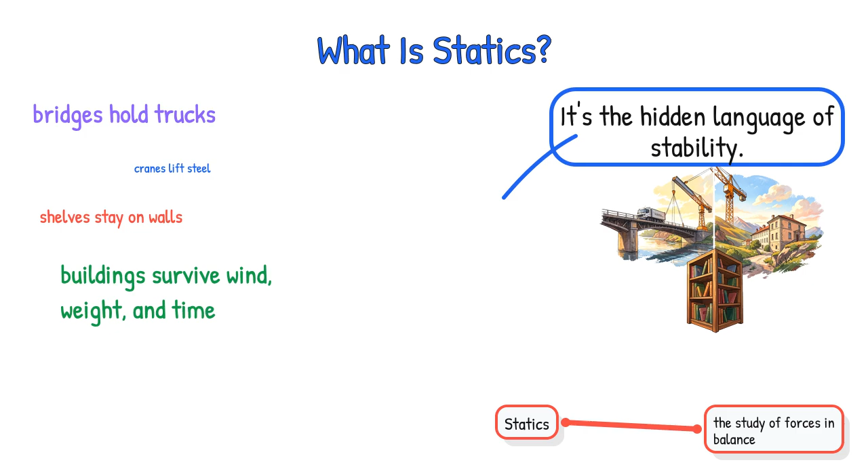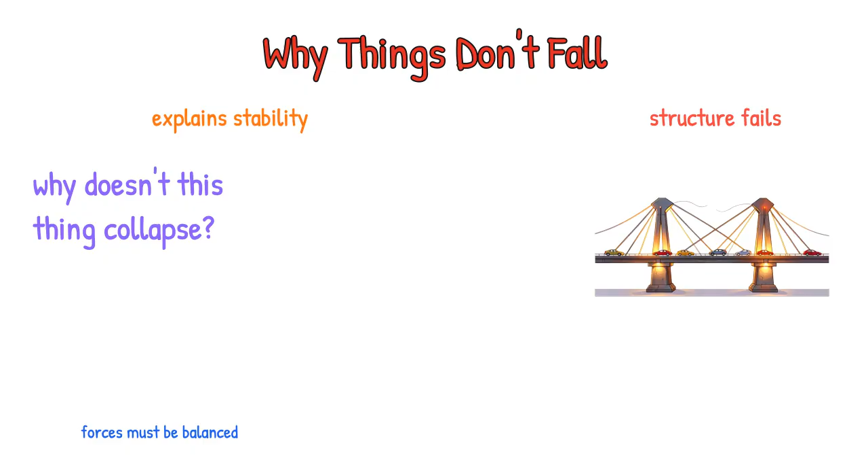The first reason statics is fascinating is simple: it explains stability. Every object around you is being pulled, pushed, compressed, stretched, or twisted. Statics helps answer the question, why doesn't this thing collapse? Take a bridge, for example. The weight of the bridge itself, plus cars, wind, and people, all create forces that must be balanced by supports and internal stresses. If those forces are not understood correctly, the structure fails. Statics gives engineers the language to predict that before anything is built.

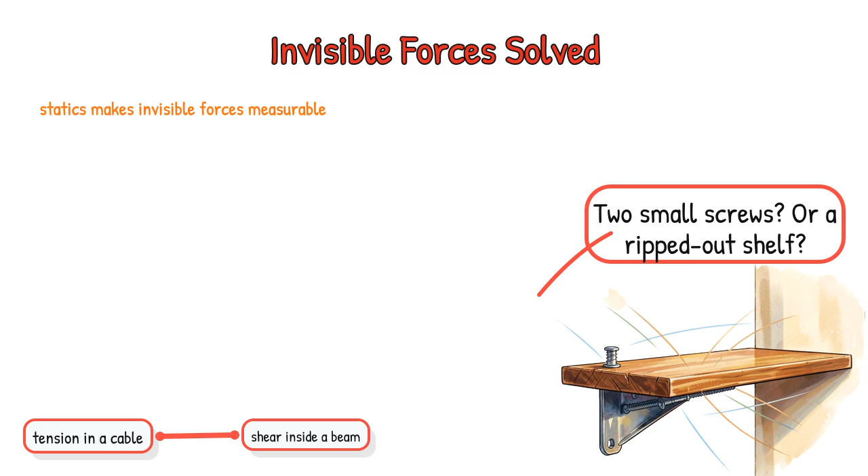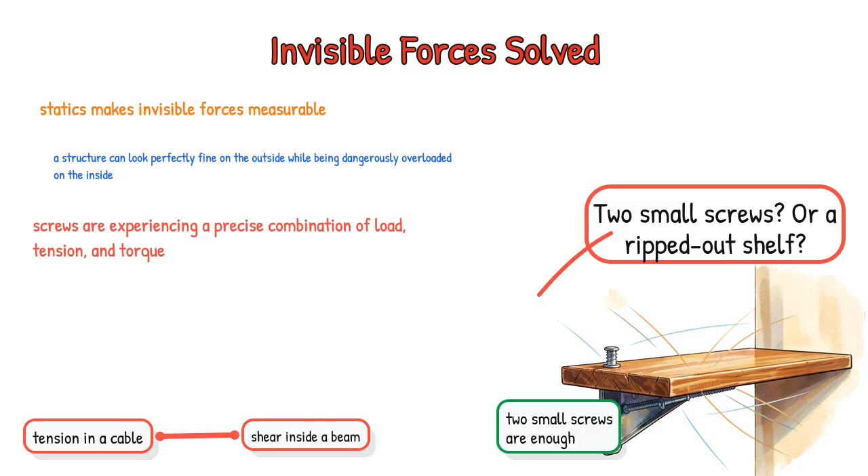The second reason is that statics makes invisible forces measurable. You can't see tension in a cable or shear inside a beam, but statics lets you calculate them. That matters because a structure can look perfectly fine on the outside while being dangerously overloaded on the inside. For example, if you hang a shelf, the screws are not just holding it up. They're experiencing a precise combination of load, tension, and torque. Statics tells you whether 2 small screws are enough, or whether the shelf will rip out of the wall the first time someone puts books on it.

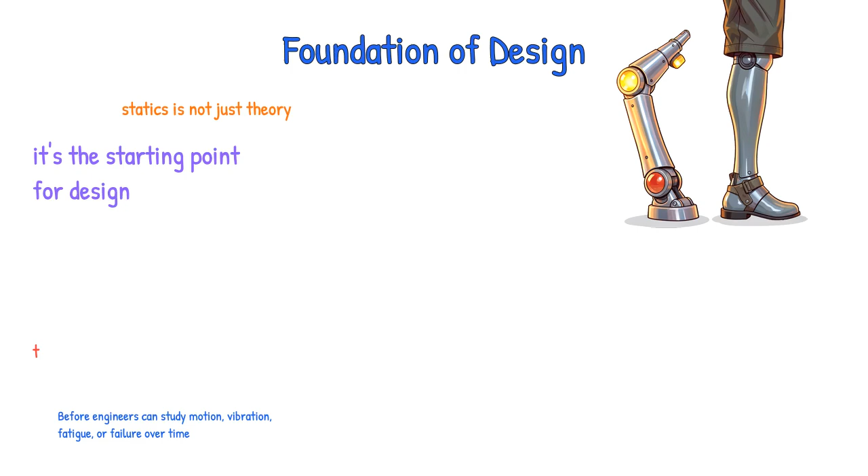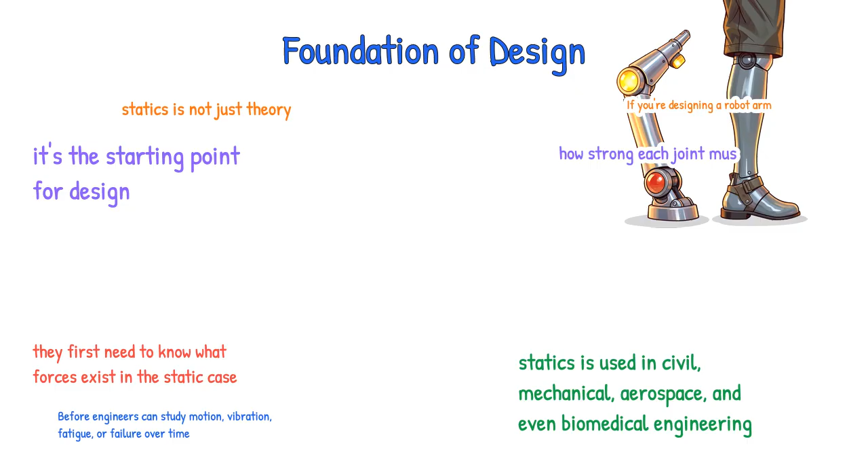Third, statics is not just theory. It's the starting point for design. Before engineers can study motion, vibration, fatigue, or failure over time, they first need to know what forces exist in the static case. That's why statics is used in civil, mechanical, aerospace, and even biomedical engineering. If you're designing a robot arm, statics helps determine how strong each joint must be. If you're designing a prosthetic limb, it helps ensure the device can support body weight safely and comfortably. In other words, statics is the part that tells you whether your design is possible in the real world.

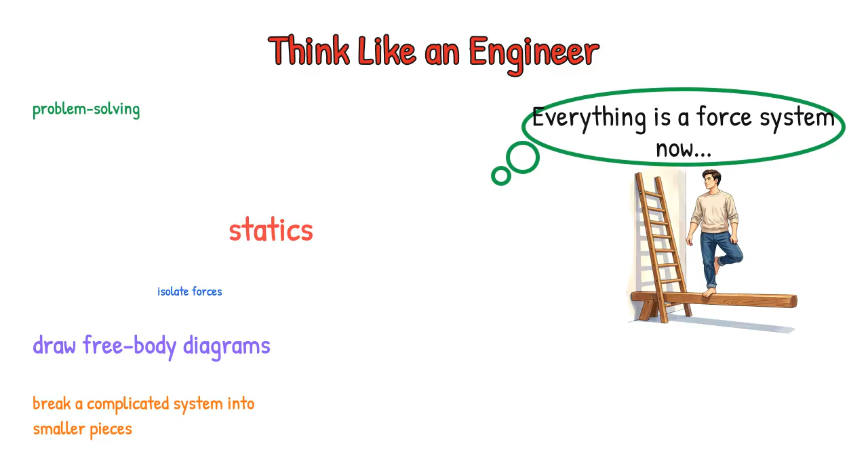The fourth reason statics is interesting is that it trains a very specific kind of problem solving. You learn to break a complicated system into smaller pieces, draw free body diagrams, isolate forces, and balance equations. That process is basically engineering thinking in its purest form. And once you learn it, you start seeing the world differently. A bicycle rack, a crane, a ladder against a wall, even a person standing on one foot—all of it becomes a force system you can analyze. That shift in perspective is surprisingly powerful.

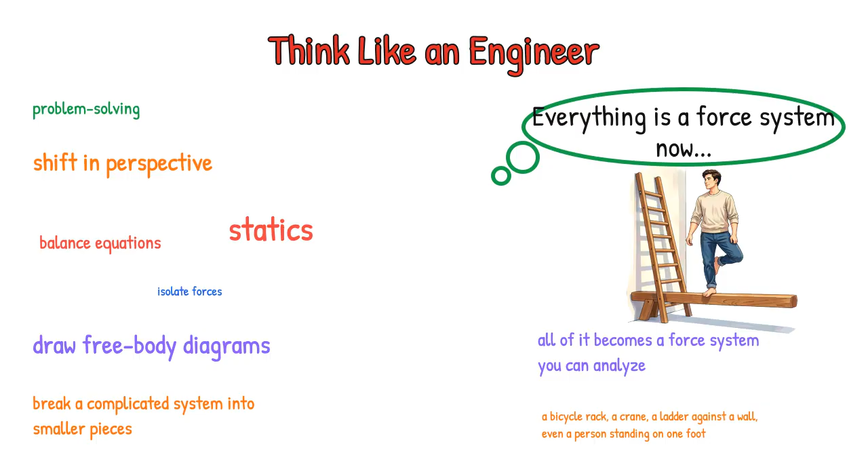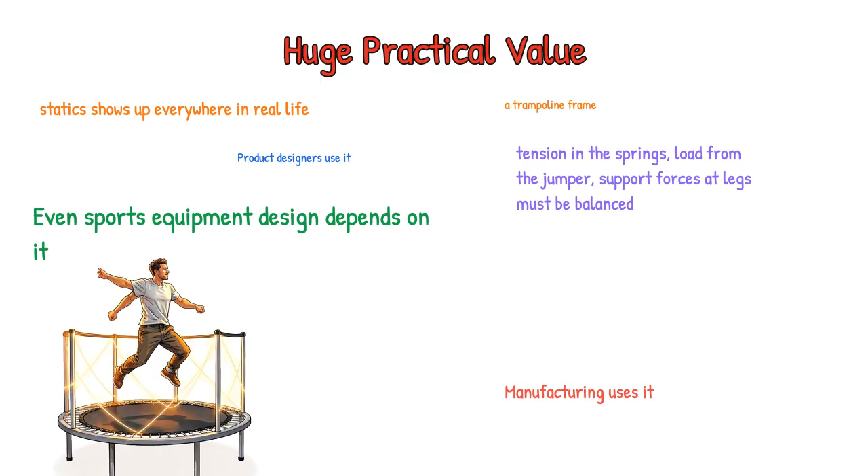Finally, statics is useful because it shows up everywhere in real life. Construction crews use it. Product designers use it. Manufacturing uses it. Even sports equipment design depends on it. Want a concrete example? Think about a trampoline frame. The tension in the springs, the load from the person jumping, and the support forces at the legs all have to be balanced. Statics helps engineers decide where to reinforce the frame so it won't bend or fail.

So no, statics isn't just a pile of equations about things sitting still. It's the science of stability, safety, and smart design. It's what lets engineers understand how the world holds itself together. And once you realize that, statics stops feeling boring. It starts feeling like the hidden force behind almost everything built around you.